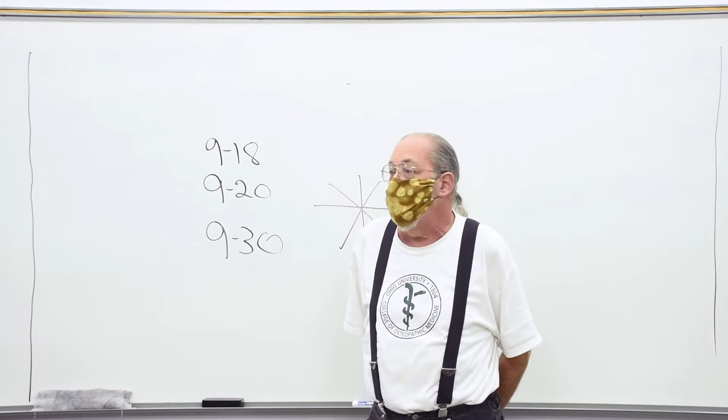Of course, you have to do other things too. You have to understand some of the principles involved as well. It's typically the multiple choice that knocks people down. That's what I often see, and that's what happened last exam. And also the all-or-none, people making what I call stupid mistakes. If you made stupid mistakes, where you look at it and go, how in the world could I have done that, that's the kind of thing you need to avoid.

So the exam will be the same. I haven't said it yet, but you know there's going to be a problem similar to these, involving Newton's laws and so forth, but you'll have the opportunity to opt out of one of the problems. There'll be 4 problems, and you choose the 3 you want to do. And the equation sheet will be attached to the exam. That saves you the trouble of memorizing the equations, but you still have to know what to do with them. The problem-solving technique is the key thing.

So once again, Monday, after the Monday lesson, I'll have all of the homework problems posted. That gives you a couple days to take a look at them before the exam. The lab for torque, I think if you've looked, it's very easy, but it's not due next week, it's due the following week. So you can concentrate on studying this material for the exam coming up on Wednesday.

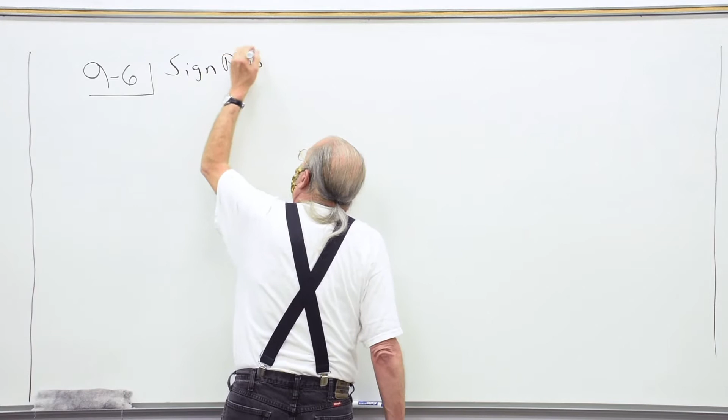Let's take a look at these. Again, we do these problems so you can learn some of the techniques used. The sign problem is example 9-6. In this problem, if you go down to downtown Frostburg, or any small town or certain sub-neighborhoods of New York City, you'll see this arrangement. This is a way of hanging a sign. I call this the sign problem.

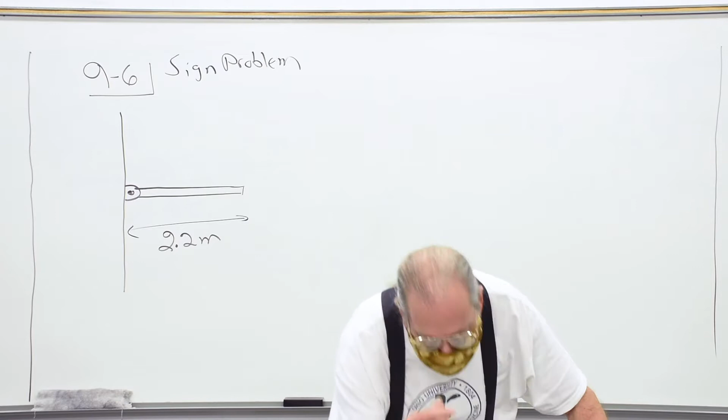It's such a common thing, it's a good one to look at. What we have here is a wall, and there's a hinge on the wall. Then we have a beam coming out, a wooden beam. In this case, the beam has a mass, it's 2.2 meters long, so the distance here is 2.2 meters. And the mass of the beam, I'll call it little m, is 25 kilograms.

I don't recommend doing what the text did, which is using a little m and a big M. I like to use an M1 and an M2, unless you have a writing technique where you make sure you can tell your little m from your big M. Otherwise you can get confused, and if you use one instead of the other, that's going to cause problems. Now, this is tied up with a wire or rope to the very end, which runs up here, and we're told that it makes an angle of 30 degrees.

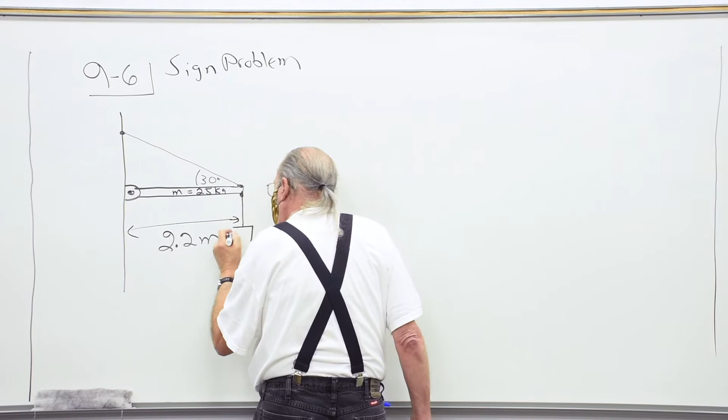All right, and it's fastened up here, and then tied to the end is a sign.

What the hell, I'll call it Uno's, because I went to Uno's yesterday. I had one of their thin pizzas, and man, I was in such a bum mood because of all this stuff going on. It just made me feel great.

Okay, well, Big M is 28 kilograms. The beam is 25 kilograms. The beam is 2.2 meters long, and the rope or wire is up 30 degrees from straight across.

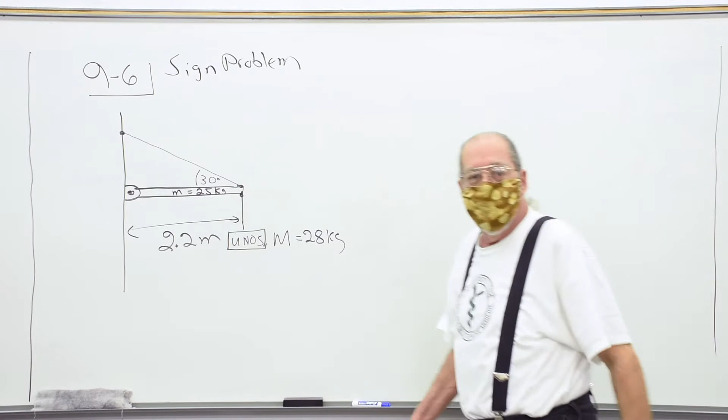And what you want to find here are all of the forces. This is the question: what's the tension in the wire? And you could say, what are the magnitude and direction of the hinge force? In this case, because it's not just friction here and so forth, there could be an X and a Y component to that hinge force.

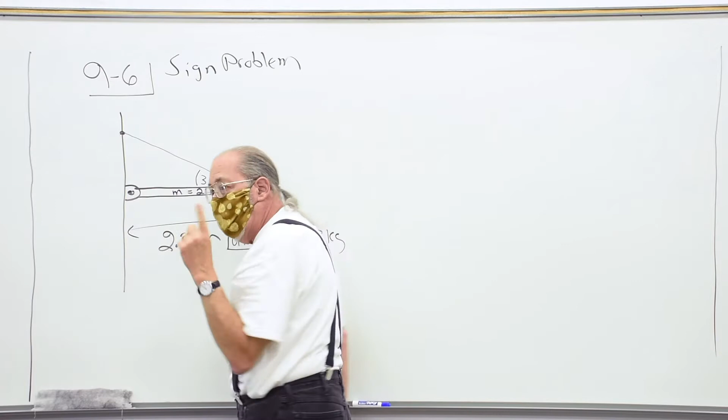So you're asked to find the X and Y components of the hinge force and the tension, or equivalently, if you know the X and Y components of the hinge force, you can find the direction of the force exerted by the hinge and its magnitude. That's a vector problem from way back in chapter 3.

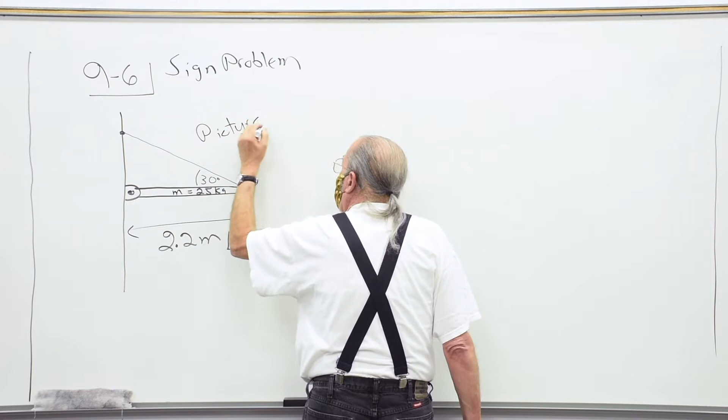All right? So we've got a reasonable picture here. Now we have to draw our free body diagram. Once again, the question is, well, because it's a statics problem and nothing is moving, anything can be considered the object that we're going to draw the free body diagram for. But what we choose are the objects or the places where the forces come together.

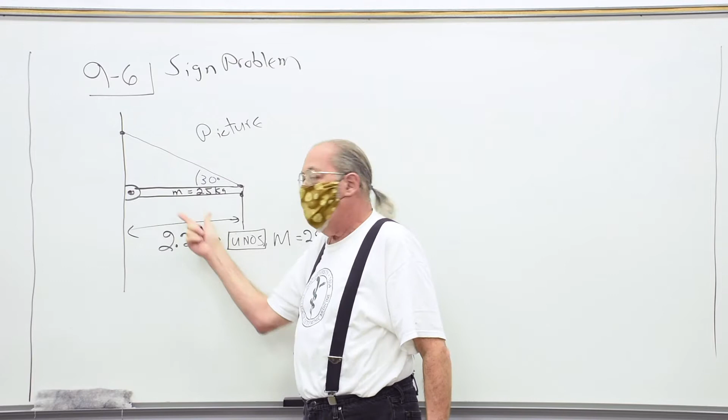Well, the place where the forces come together is the beam. Everything is touching or influencing the beam. So we're going to consider the beam. We draw the beam. There's our beam. And now we have to draw it straight, of course. That's straight. Closer to straight. Yeah.

Gravity is acting on the beam. But we assume it's a uniform beam. We have to do that. So where is the force of gravity effectively concentrated? The center. The center of gravity of the beam is here in the middle. So what we have here downwards, acting on the middle, is little m times g.

And we need to mark these distances. You need to mark all of the distances. Over here on the end, we know that this is pulling down, and we formerly solved for it with the chandelier. I'm going to skip that step now. We know that the tension right here is going to be big M times G.

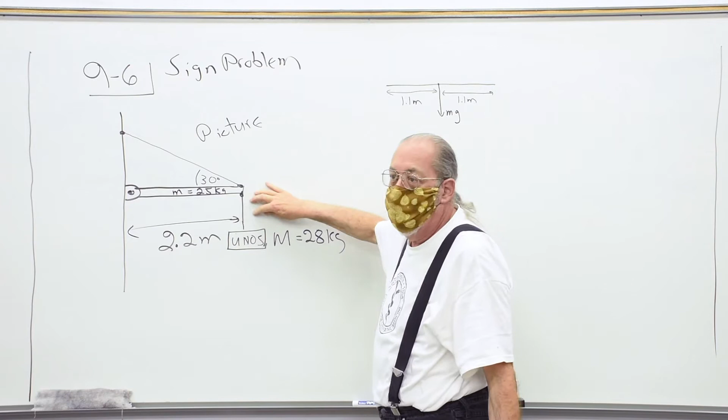Technically, we draw the free body diagram of the UNOS sign. We get that the tension is equal to the weight of the sign. But I'm just going to skip over that part. So we know that out here is another vector downwards of big M times G. Then there is a tension this way. Now, let's talk about this.

The textbook does this a different way. I'm going to do it my way. Somewhere in between my way and the textbook way, you'll see. The tension, we know the direction of the tension. It has to be 30 degrees up. Ropes pull, right? Ropes pull. All we need is the magnitude, one unknown. So I'm going to draw it like this.

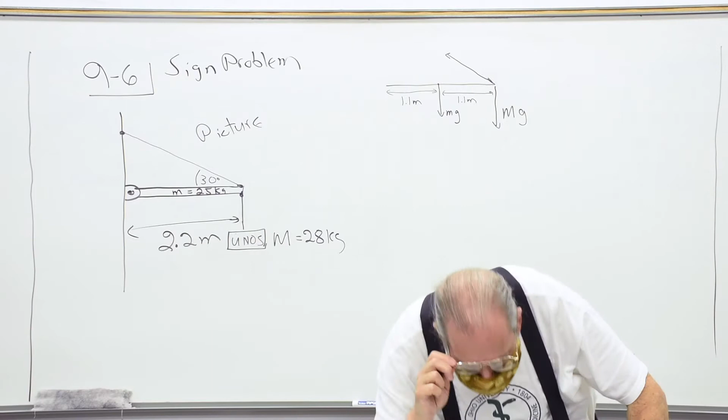Like that. And I'm just going to call it FT, or they call it FT, so I will too. Generally, I just call it capital T, but whatever. And we need to draw this angle. It's 30 degrees.

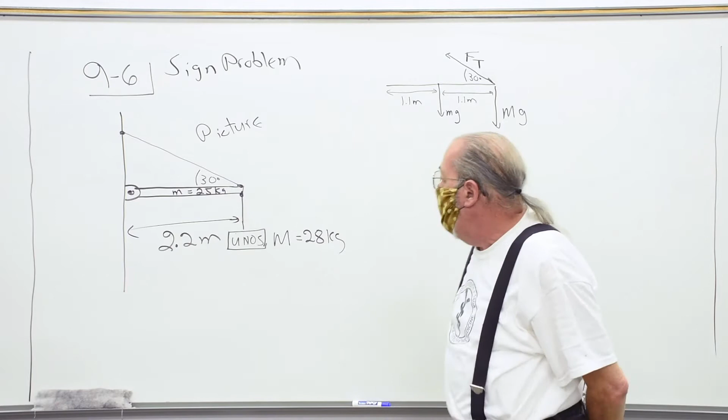Then there's the hinge force. The trouble with the hinge force is we don't know the direction of the hinge force, and we don't know the magnitude of the hinge force either. Now, we could draw it like this and put in an unknown angle and have to solve for the angle. But it is equivalent—remember that knowing the two components of a vector is equivalent to knowing the vector. If you know the two components, you can find the angle and the magnitude. Okay? So, we know that the hinge is not going to be pulling, it's going to be pushing.

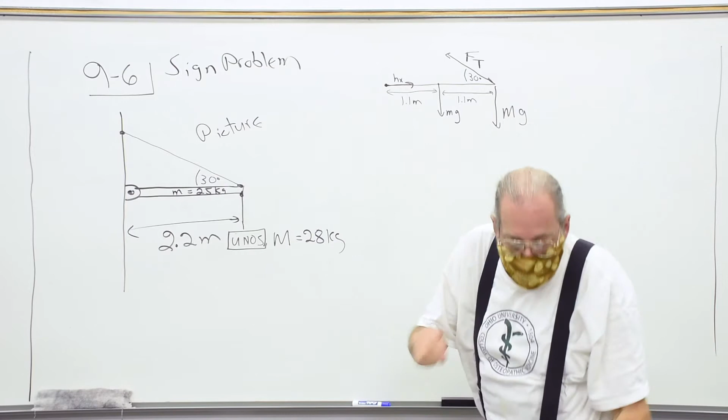So there is an x component to the hinge force, right there. Do they use capital H? They use FHY. Oh, heck, man, just call it HX and HY. And then there could be a vertical component. Now, this is interesting. Depending on the arrangement of the stuff, the hinge force could be up or it could be down.

The vertical component could be up or could be down, depending on where this sign is attached and so forth. But I think what you can see is, if this were frictionless, because gravity is pulling this way, it would fall.

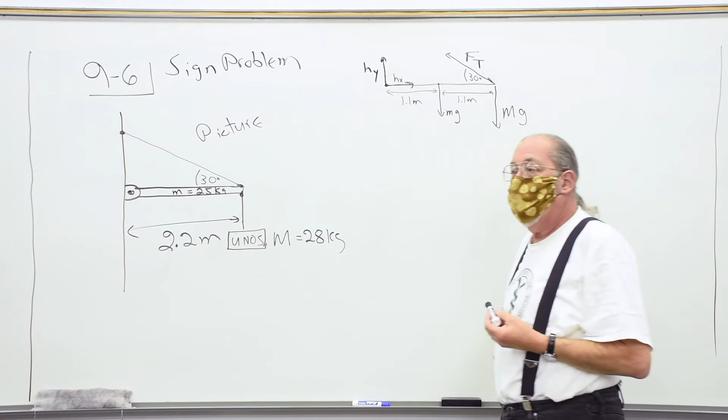So most likely, the y component is upwards. Now, if you're not sure, you assume a direction, and if you get a negative sign, it means that the actual direction of the force is opposite what you assumed. So at the moment, we'll just assume it's upwards. But if it turns out it was downwards, we'll get a negative sign for this, and that's perfectly fine.

Normally, when we label these things, these are the magnitudes of the forces, not the components, not the actual component values. They're the absolute value of these things. So if you get a negative sign for an absolute value, it means your assumption of the direction was wrong. You don't have to redo the problem. You just say, my assumption was wrong. I had it drawn up. Therefore, it is down.

Yes? I might have missed it, but how do you know that the hinge is pushing instead of pulling? Okay, look at the x components. Does this have an x component? Does this? Does this? Does this? Which way is it? To the left. So what's the only thing left to counteract it?

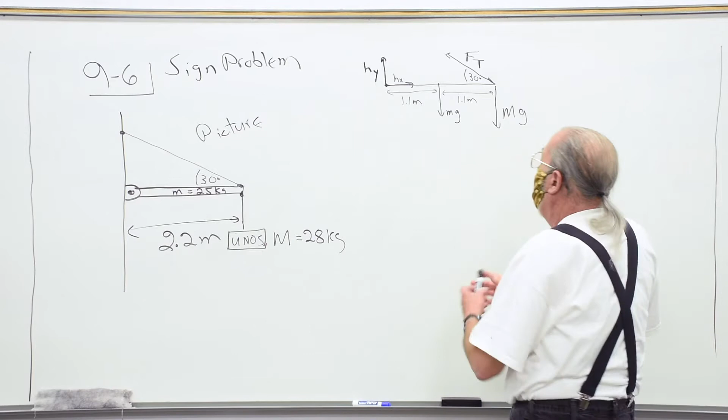The hinge. So this is the thinking that's left out in the textbook. You say, how do they know that if this is a pin here, this thing could be pulling on it. But since the x forces have to cancel out, we say, well, this is going this way, so this will counteract that. So any other questions? These are the little things that you can look at and go, how the hell did they know that? Well, there was some analysis done.

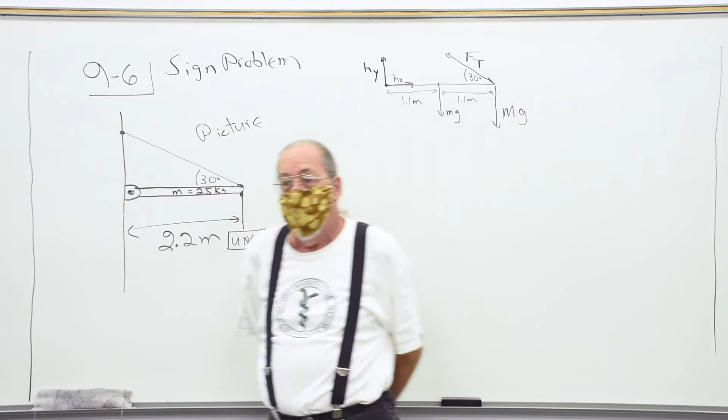Yes? How does a hinge actually pull something? Doesn't it just allow something to move on a fixed? No, it's attached to the wall. It's physically fastened to the wall. If it was just pressed against the wall, it could not pull. But see, I drew that there just to show that it's fastened to the wall. So it can exert a force in any direction. That sucker isn't just pressed against the wall, it is fastened to the wall, glued to the wall. So it could push or pull, okay?

Picture, free body diagram, coordinate system, might as well use the usual, okay? Immediately, we can consider the sum of all the x components. Now we apply the conditions of equilibrium.

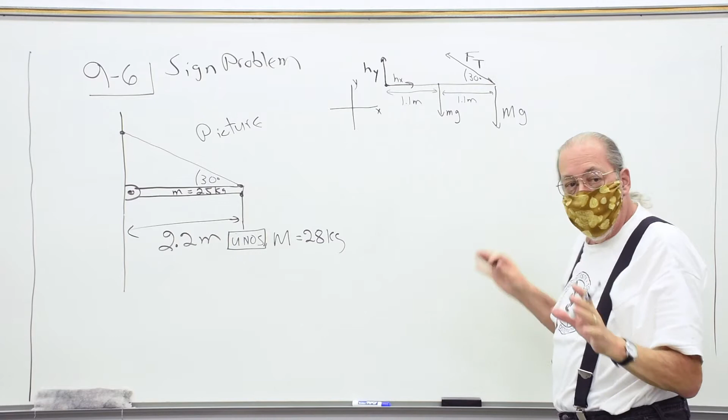As I say, the best thing to do is to apply the first condition of equilibrium initially. Don't use torques unless you have to. If I apply the first condition, this says that the sum of all the x components and the sum of all the y components must be 0. So if I say the sum of all the x components is equal to 0, well, now we see

that we have a plus hx, and then if we break this into its components, the x component of this tension force, this is the adjacent, this is the opposite, and this is, of course, the hypotenuse. Adjacent means which trig function? Quick, adjacent goes with cosine. You should be able to do that automatically even if I burst you out of your bed at 3 in the morning. So it's, and is it positive or negative? It's negative. Minus

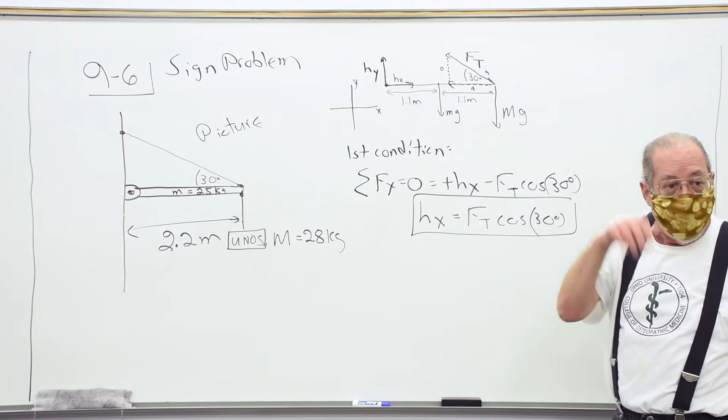ft cosine 30 degrees. So there, it says the x component of the hinge force, bringing this over, is the tension force, but we don't know yet the tension force. But once we get, if we get the tension force, somehow, then we will put it in here and we'll get the x component of the hinge force. All right, but we're not finished yet.

Now, if we do the sum of all the y components, that equals 0. And we got a lot here. We got an hy plus hy. Then we have a minus mg. And we also have a minus big mg. And then we have this component pulling up. We've got this component pulling up here. And so we have, and it's the opposite, so we have a plus tension force sine of 30 degrees. Okay?

Let's just leave it like that, okay? Let's just, and I'll make that more like a plus sign. So there's another equation.

So what does this tell us? It tells us once we know the y component of the hinge force, we know this, we know this, we know the sine of 30, we can find the force of the tension once we know the y component of the hinge force. But we don't know that yet. So we got 3 unknowns. We're actually going to have 3 equations, oh my gosh, and 3 unknowns. Don't worry yet, okay? 3 equations and 3 unknowns. But once we get the tension force, we could find the y component of that. We could also find the x component, okay, from that. All right.

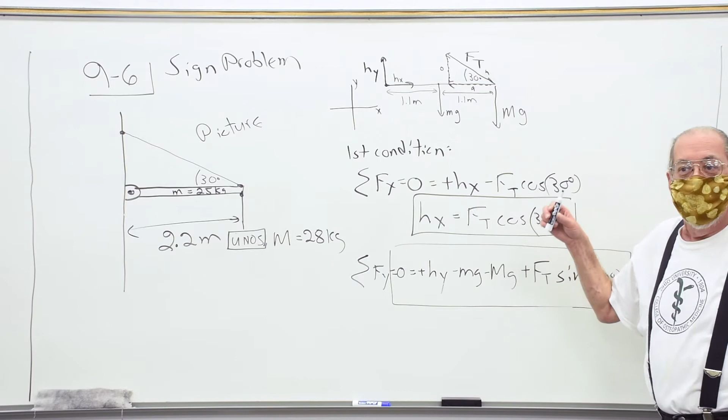We ran out of the first condition. So when you run out of number 1, where do you go? Number 2. You go to number 2. Okay?

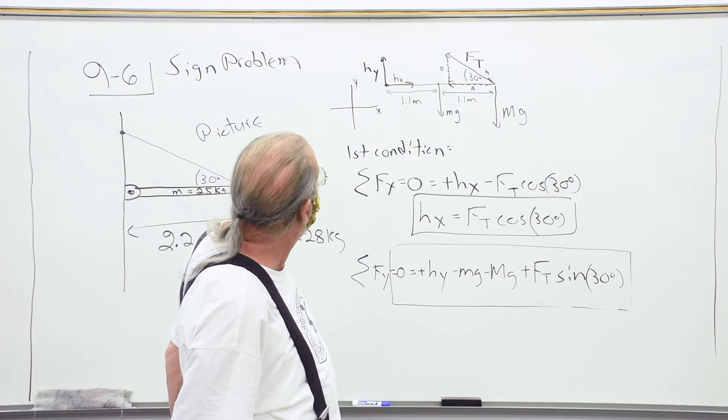So now we've got to use the second condition of equilibrium, which says that the sum of the torques about any pivot you choose is going to be 0. Now, any pivot can be chosen, but there are a couple of places here where it really is a no-brainer to put the pivot. When you choose a pivot, any force applied to that pivot produces a torque of how much? There's a good multiple choice question. Once you choose a pivot, it produces a torque of 0.

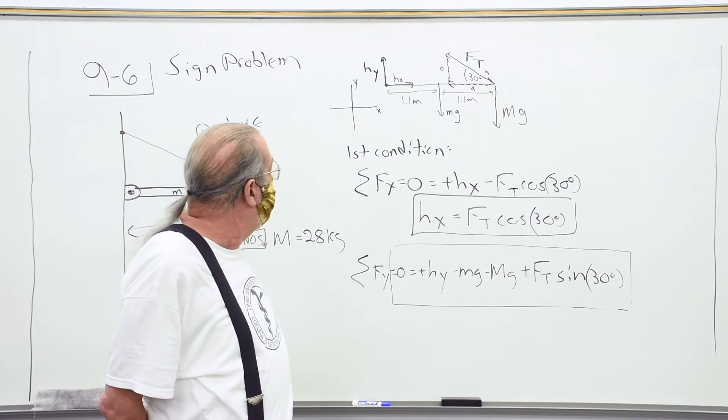Well, I see two places where multiple forces are applied. What are they? The left side's got Hx and Hy, and the right end has got Ft and big Mg. That says if I put my pivot here, the tension force will not be in the resulting equation. And as a matter of fact, if I put my pivot here, will Hx be in the equation? Where does the line of action of Hx go? Right through the pivot. Okay?

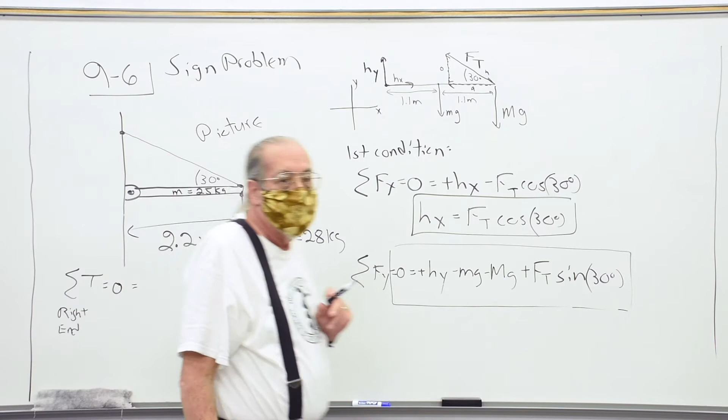So what the hell? I'm free-forming now, which means I could screw up, so you got to watch me. I'm going to put my pivot at the right end. So over here, the sum of the torques—and you must tell me, you must specify—the sum of the torques about the right end is 0. All right.

Ft does not produce a torque. Big Mg does not produce a torque about that point. Hx does not produce a torque about that point. This is almost the ideal point. Only Hy and little mg are in this, right? Well, hell, that's going to be easy.

So, looking at Hy—here's our pivot, I'll put our torque there—is this a positive or a negative torque? If this were the only force acting about this point, what would it do? It would go clockwise. Clockwise is negative.

Negative. The angle here is 90 degrees. The distance is 2.2 meters. So it's minus Hy times 2.2 meters.

And this one is going to produce what sign? Positive. Well, how can you tell it's got to be positive? Because you got a negative, you better have a positive if it's going to add to 0. So we have plus little mg times 1.1 meters. And this again is 90 degrees.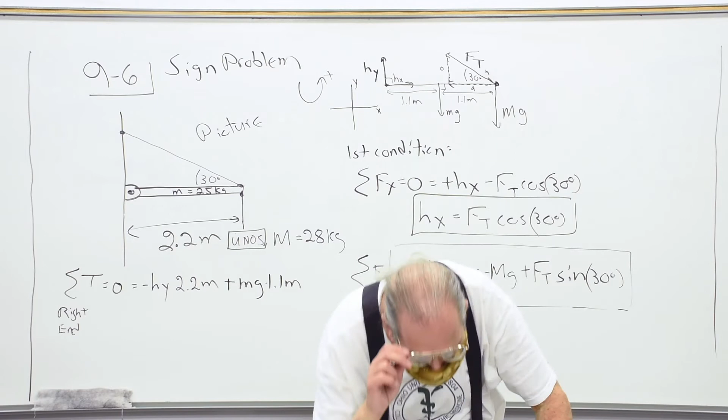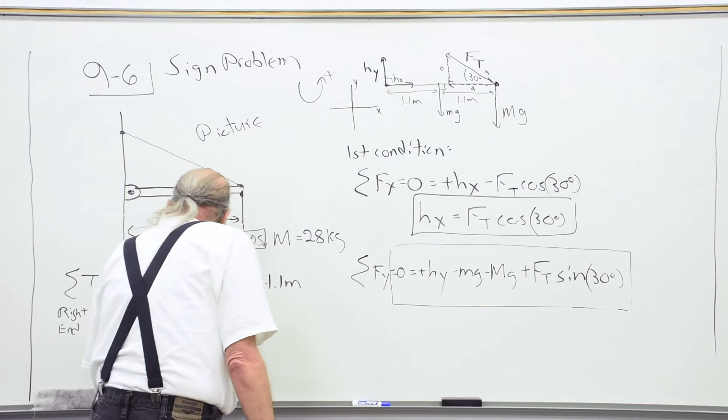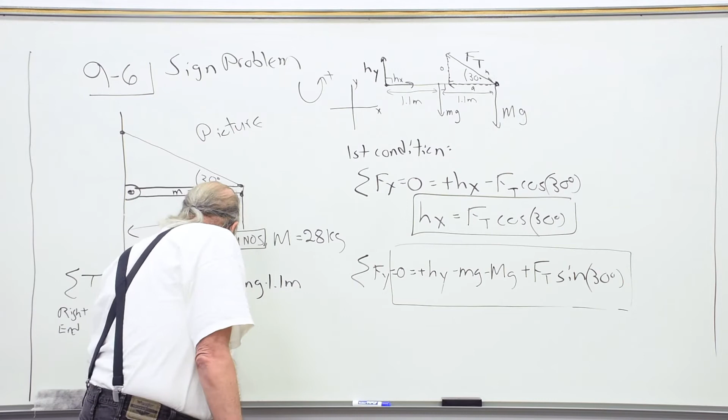So that's it. Okay? And if you solve that, I believe somewhere they did this here. Yes, all right. When you solve that, you get 123. Let's just do it. What you get is Hy times 2.2 meters equals mg times 1.1 meters. And the meters cancel. And this says that Hy is 1.1 over 2.2 times little mg, which is 1/2 of little mg, which is 1/2 times little m is 25 kilograms, 9.8 meters per second squared. And I believe that is 123 newtons.

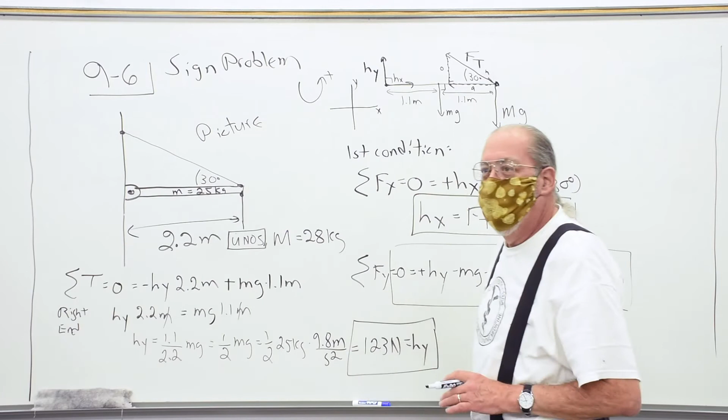Hot dog. Yes. You push the computer screen down. Did I what? You push the computer screen down so we can see the bottom of the desk. Oh, I hate this thing. Yes, no? Can you see it? Perfect time. Are we checking? Yes.

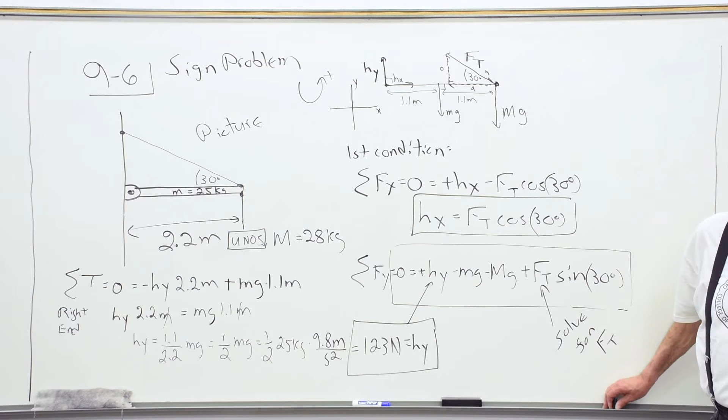All right, we've got HY. Well, quote, I'm going to leave it to you. You take this and you put it into there, and you put in little mg, big MG, and you solve this for FT. Do people see that? If you know HY and little m and big M, you can move all of this over and divide by the sine of 30, and you can solve for FT.

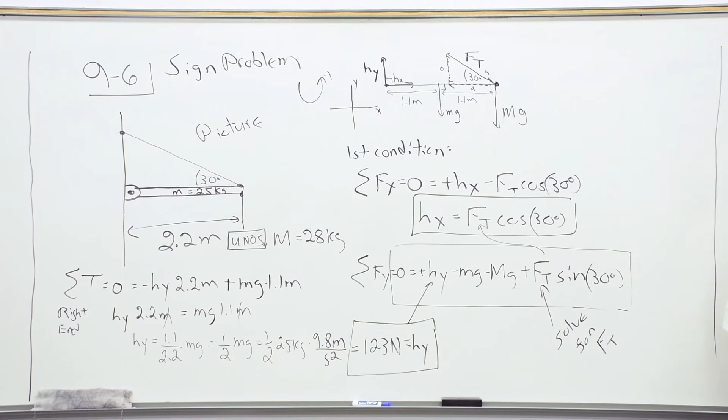And then you take that, once you have that, and you put it in there, and you find HX. And you're done. Then you're done. Okay?

By being clever, by noting that the line of action of this force goes through that point, and these are applied at that point, these don't occur in the final equation, and you can find that. And it turned out to be positive. And you can see what's happening is, this thing wants to go down. It wants to go down, so this is holding it up. This is holding it up. And is it, Brianna? That it's pushing because it's offsetting the tension.

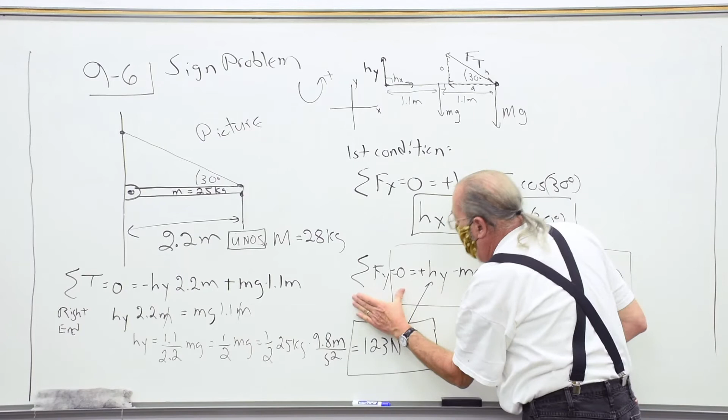So at this point, see, once you get to the equations, the physics is done. The physics is doing this. The physics is this. The physics is that. That gives you the equations. Then it's a math problem. In this case, you've actually got 3 equations and 3 unknowns because you're clever. One of the equations you get right away only involves one unknown, and you can solve it. Boom. And then you can put it in the next one and get the next. You can put that in the next and get it, and you're done. That doesn't always happen, but it does in this case.

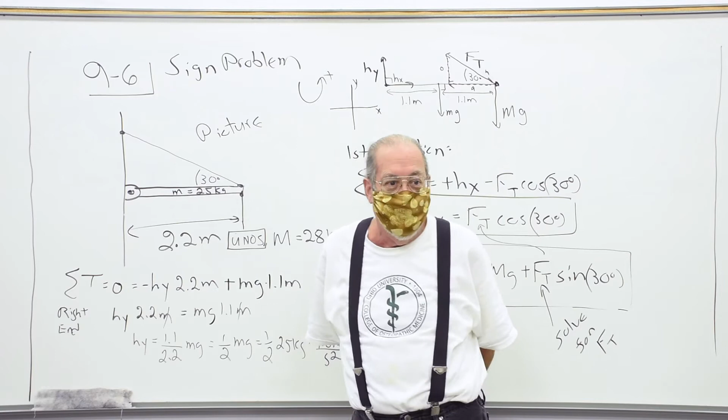Let's go and let's look at the ladder problem.

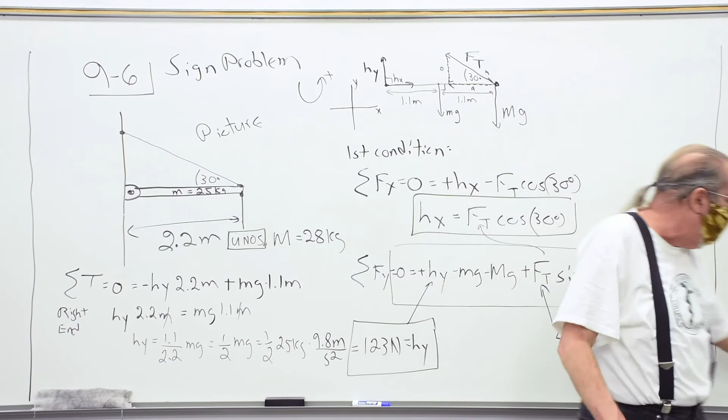Ladders, people, are dangerous. My house is 3 stories high in the back, and it is a nightmare to paint. If I ever do it again, I'm buying one of those trucks with a bucket - I'm not doing it from a ladder anymore. That's crazy, that's nuts. Someday I'd love a ranch house and never go up or downstairs again, but that's not going to happen. You know how hard it is to move after being in a place for 30 years with all the garbage you've collected. Anybody watch American Pickers? I've been in a house like that - not mine, but I can't believe what some people live in. So I can't give that up. I only have 3 of that - if I sell you one I'll only have 2, and I've got 3 right now.

The ladder problem. This is example 9-7, another classic case that does occur out there.

In this case, what we have is a ladder up against a wall, and it's 5 meters long. Mine's about that - I've got one that's 32 feet, that's more like 10 meters. It's really long, sitting like this.

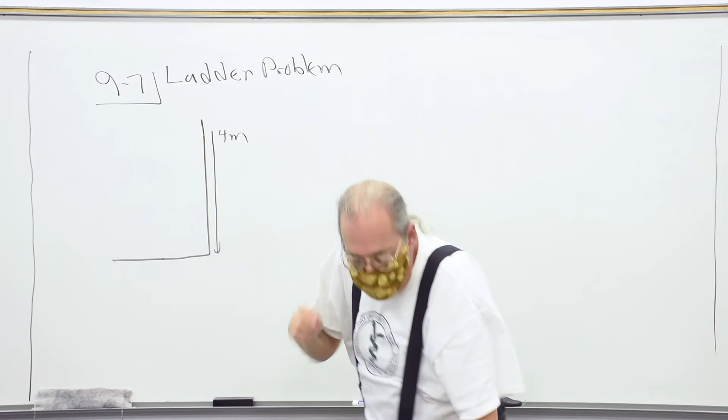We are told it is 4 meters from the ground to the top of the ladder. Actually, it's not quite that steep. Let's see - it leans against the wall. The ladder is 5 meters long, and it touches up here 4 meters above the ground.

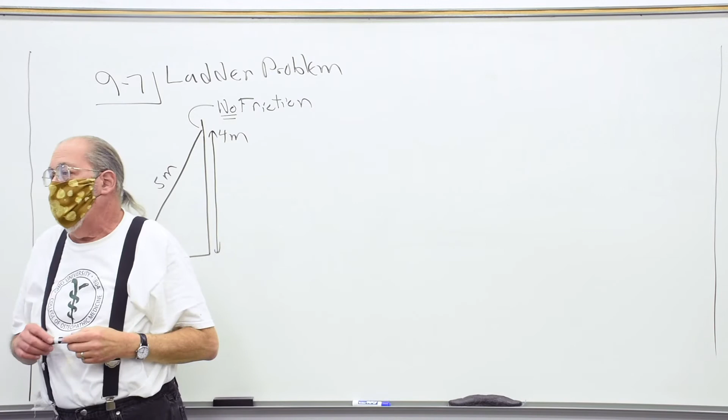And of course there is friction down here - there better be, or what will happen if there isn't? This is interesting: we have to make the assumption of no friction at the top. It turns out if there's any friction up there, it's an infinitely harder problem. Now you might say that's not realistic, but it is.

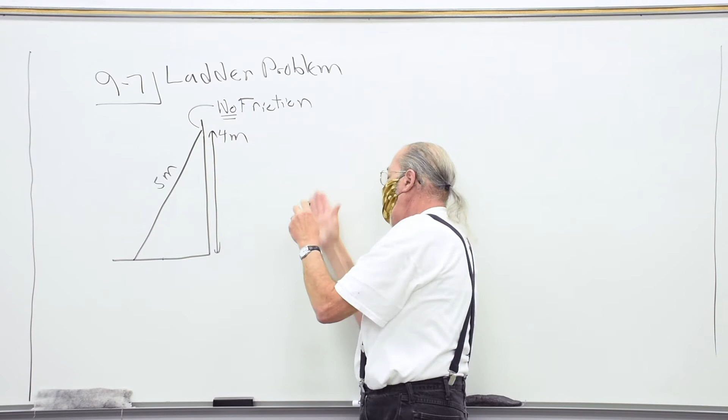If you ever go to Washington D.C. and look at the Air and Space Museum, the outside is made of highly polished granite. You take a ladder with a plastic top and touch it against that granite - even if I touch this board, there's almost no friction. So there's zero friction up there, okay?

And what we want to find is all the forces. The mass of the ladder is 12 kilograms.

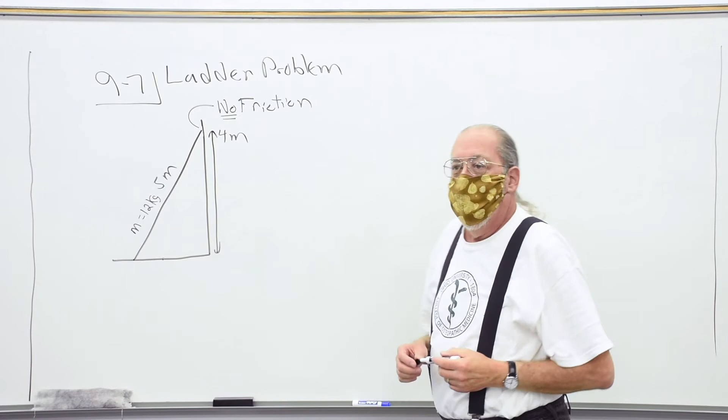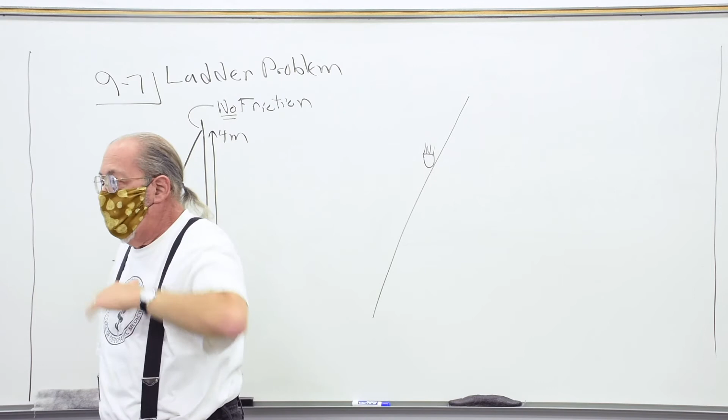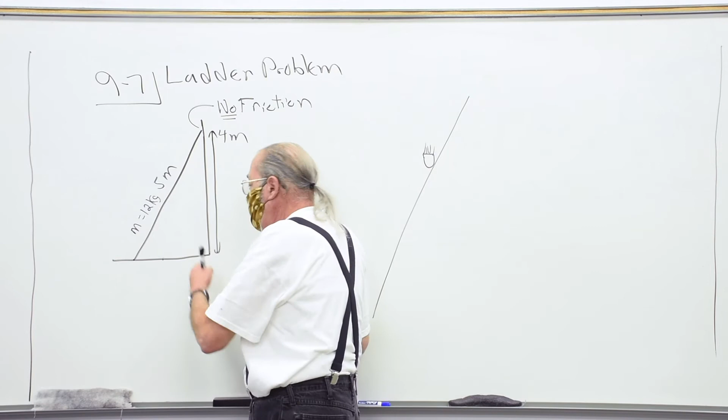Now, since I'm a ladder climber all the time, and a lot of you will have ladders someday - there is a proper angle for a ladder. If you look at the rungs, they're attached to the ladder at an angle, and the top of the rung should be horizontal when placed properly. If it's too steep or too far out, it's not at the proper angle. What happens if it's too far out? I've seen guys working on their houses and thought someone better call an ambulance. I already told you about the guy who got dragged off the roof. And if you put it too close, you do a John Belushi from Animal House - you go off, okay?

So the question here is to find all of the forces involved, with no friction at the top. So we have a picture, check, and a free body diagram.

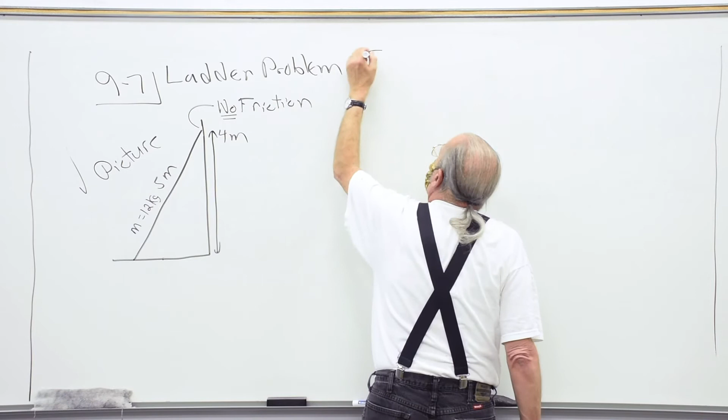In this case, the forces are the wall and the ground, acting on the ladder. We consider the ladder and the forces on it - that's what we draw the free body diagram on. So we draw the ladder, and we have to include some of these dimensions: this is 4 meters, this is 5 meters, like that.

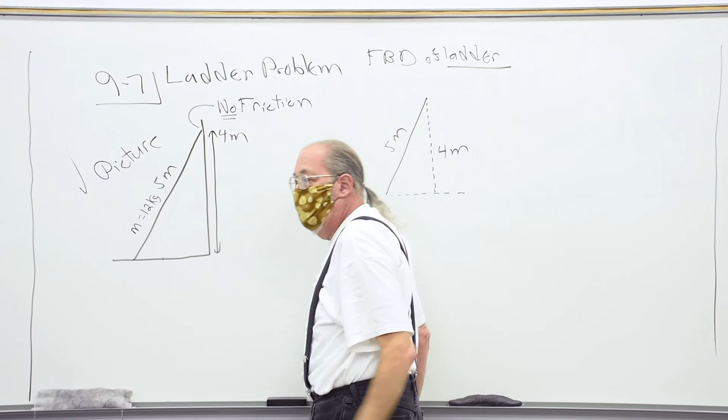Now, if there is no friction up here at the top, does that mean there's no force? What's the direction of friction - parallel to the interface. If there was a frictional force, it would act this way, but there is none, which means the force is horizontal, and it must obviously be to the left. I want to be consistent with the text - they call this the wall force.

Does everybody see why it has to be to the left? The ladder wants to go this way, and it's countering that, going the other way. It must not tilt up or down, because that would mean friction, and there's none. So it's a normal force—this is the normal force of the wall on the ladder. It's another way of looking at it.

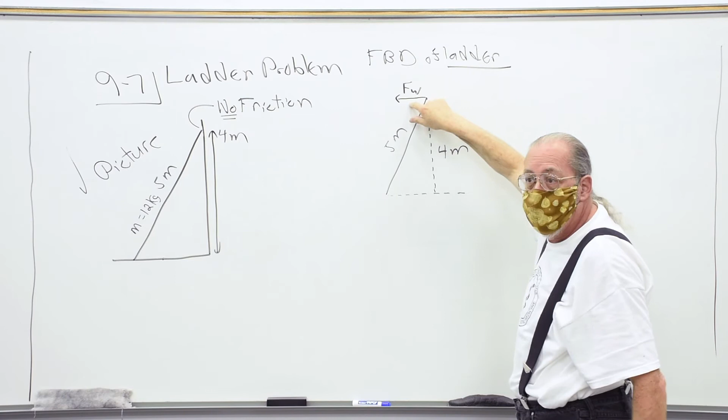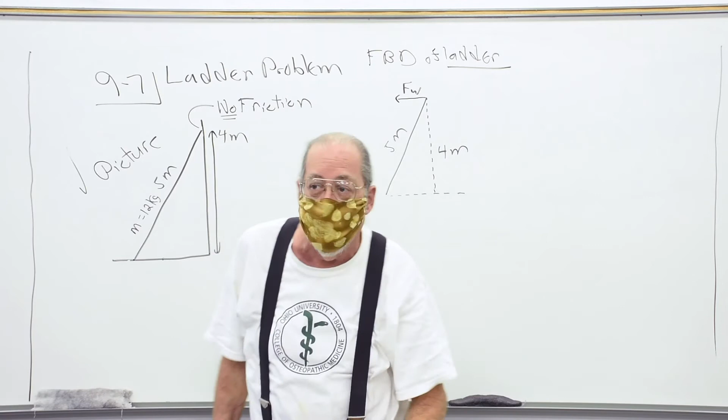But like we did for the hinge force, since we don't know the direction or magnitude, it's easier to draw it as two components. Obviously there has to be something to counteract this.

What about gravity? Let's look at gravity. Where's gravity acting? Downwards, from the center. Good. Right here in the middle is mg.

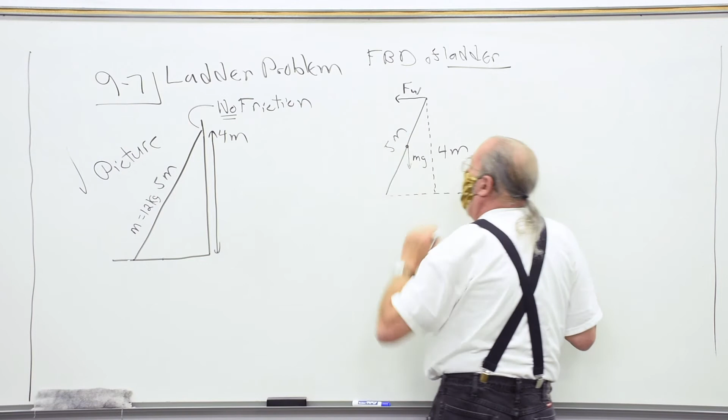And if we want—this is, I think I'll leave it out, but it's 2.5 meters here and 2.5 meters there, okay? Then there's the ground force. Well, the ground isn't pulling down for sure, it's pushing up. In fact, the ground doesn't have to be pushing completely up, straight up.

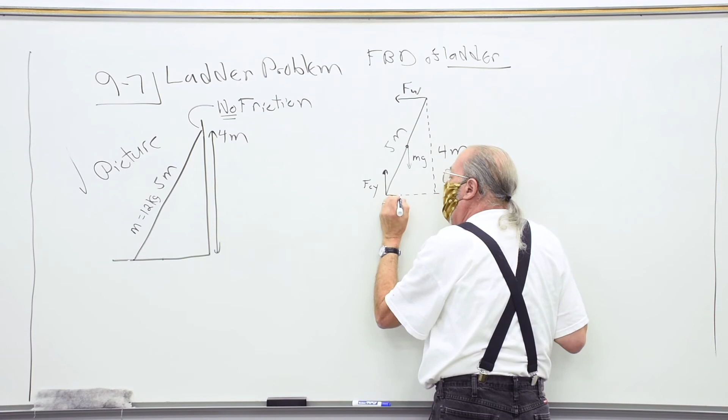So are they calling this FCY? I would call it—well, they call it FC. I don't know why they do that. But there is a Y component here, and then there is an X component here. I would have called that a G—force ground Y, force ground X.

Who wrote this book? It's a cement floor. Huh, cement floor—I think that's where the C came from. Does it say it's on a cement floor? Yes, okay, okay, all right. Does the fact that it's cement really mean anything? It means it's gonna hurt more if you fall. Yes, it is. You ever fallen off a ladder? I have. I like what John Belushi does in Animal House—he just, bam, goes back. Or no, what's the other one—Christmas Vacation, isn't it Christmas Vacation where Chevy Chase, or whoever, I forget, falls?

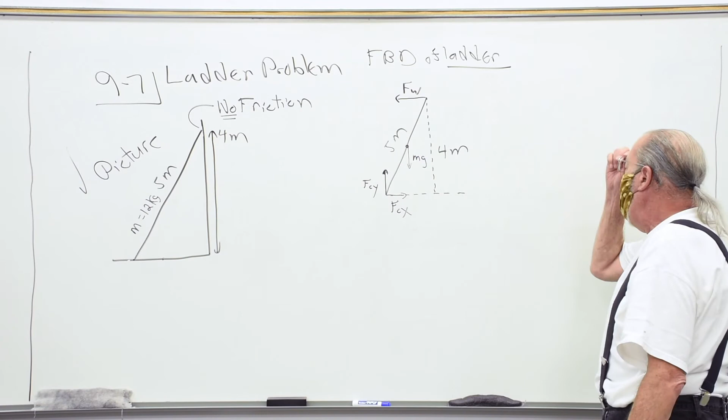All right, this is actually, it looks complicated, but so what do we apply first—the torques or the first condition? First condition. We apply the first condition of equilibrium.

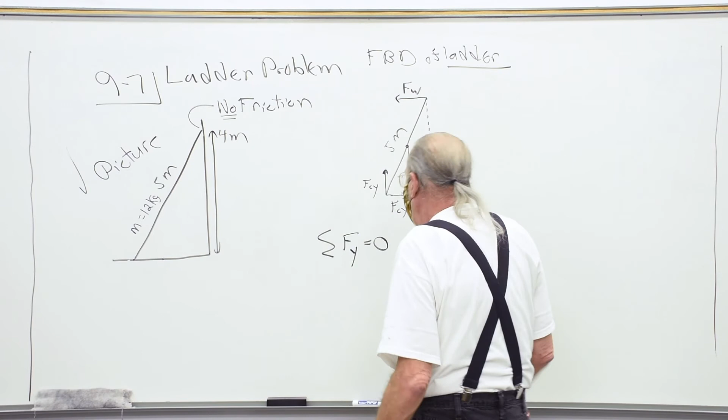The sum of all the y components on the ladder is 0 because its acceleration is 0. Well, this has no y component—the wall doesn't, and the cement floor X doesn't. But we have a plus FCY and a minus mg. And there you are—the y component, the floor is pushing up with an amount equal to the weight of the ladder.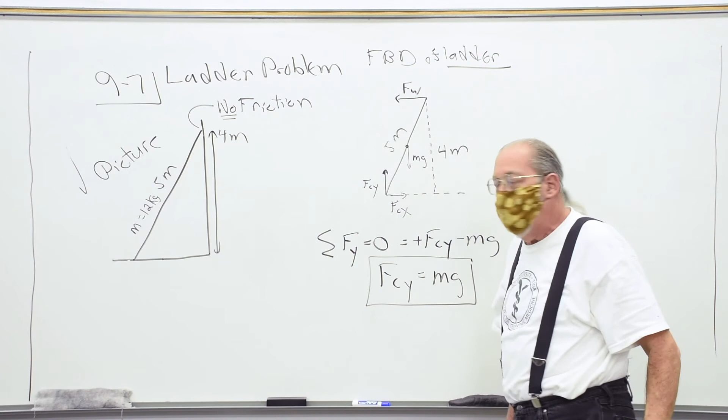Put in 12 kilograms times 9.8, it comes out to be 118 newtons. So you put in the 12 kilograms—I'm letting you do that calculational part.

That's math, that's arithmetic, that's not—all right, let us do the horizontal. The sum of all the x components is also equal to 0. And we have a plus FCX and a minus F wall, which tells us that the force exerted by the wall offsets the horizontal force exerted by the floor. One's pushing it left, one's pushing it right.

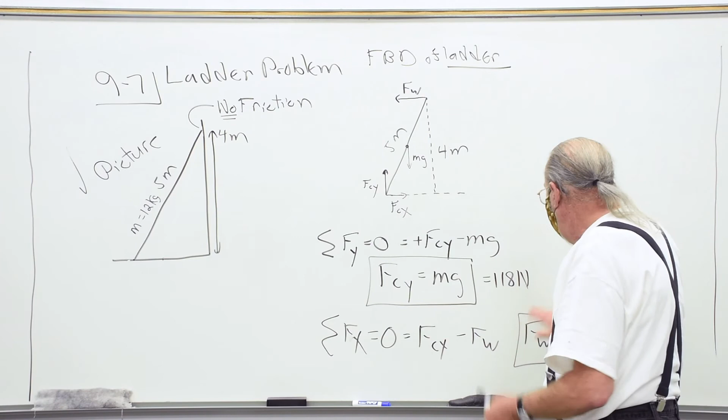But we don't know either one. We don't know either one. But at least we know that once we get one, we got the other right away. So how do we get one or the other? Well, if we've used the first condition of equilibrium, now we go to the second. It's kind of a no-brainer.

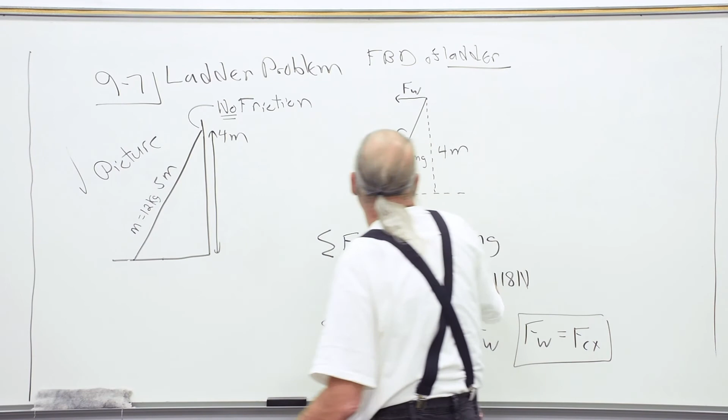I'm going to take the drawing off here to make room. Anybody want to suggest where I stick the pivot? That sounds disgusting, but anyway—what's a pivot I should use? Which is the only point that has two forces on it? The bottom of the ladder. Obviously, the bottom of the ladder.

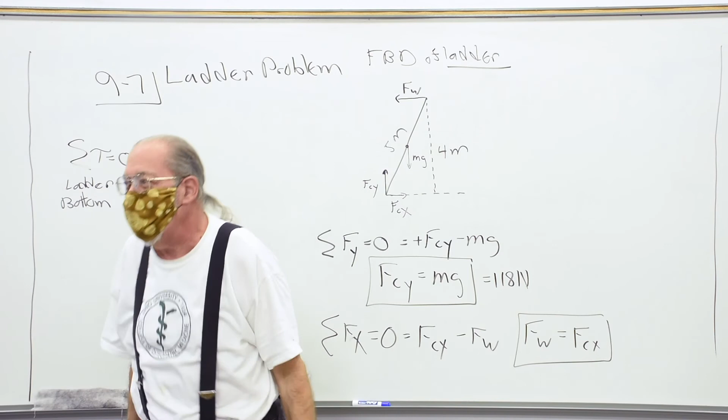So the sum of all the torques about the ladder bottom—notice how I write it in here—must equal 0. So does FCY or FCX produce any torque about the bottom? No, that's why we chose it. Okay, so there's a 0 and a 0, I won't write them down.

All right, now what about gravity and the wall force. Oh man, this is not a 90-degree angle, is it? And this sure isn't a 90-degree angle either. However, could we find those angles? Since we know the opposite and the hypotenuse, could we find this angle and this angle? Yes, we could. And if I know this angle, can I find that angle? Yes, I could. And then could I find this angle? Yes.

And then you use the torque as Fr sine theta. Oh man, oh man, well, we could do that, but there's an easier way. What is the torque produced? Well, first let's look at Fw—is that, compared to this point, a positive or negative? It's this—is that positive or negative? Positive, that is positive, so we have a plus Fw, and how far is that force?

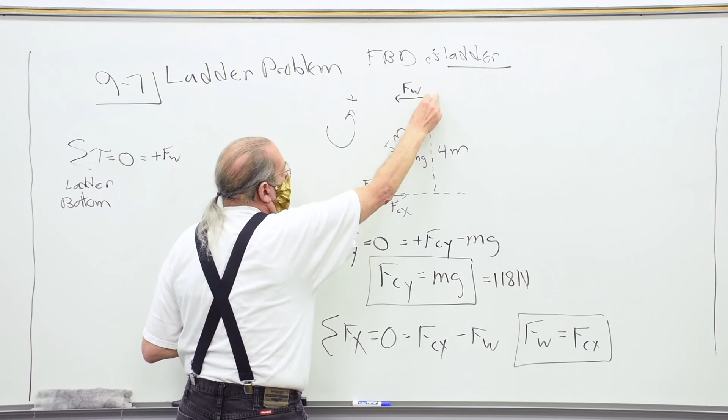What? Well, let me put it this way. This is where you get clever. Let me draw the line of action of this force.

I could use this angle and use Fw times 5 meters sine of this angle, but I don't want to do that. It's too much work.

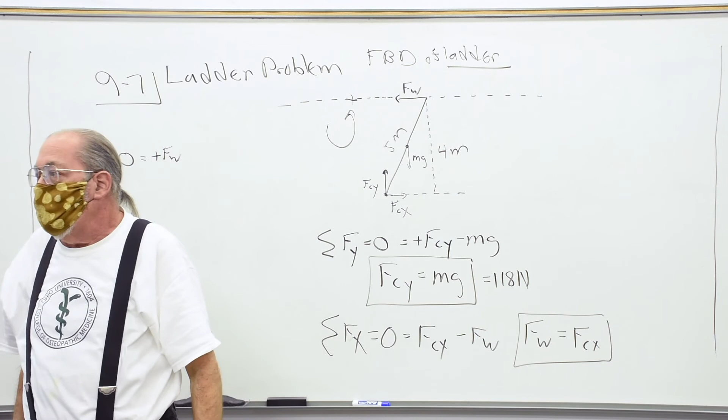What is the distance from the line of action of Fw from the pivot? 4 meters, you see that? This distance from here to here is 4 meters. That's it. You don't have to use Fr sine theta. You can just look at it and say, that's 4 meters. Okay? That's 4 meters, and you're done.

Now what about the torque produced by gravity? Is it plus or minus? It's minus. We better have a minus. And it is little mg.

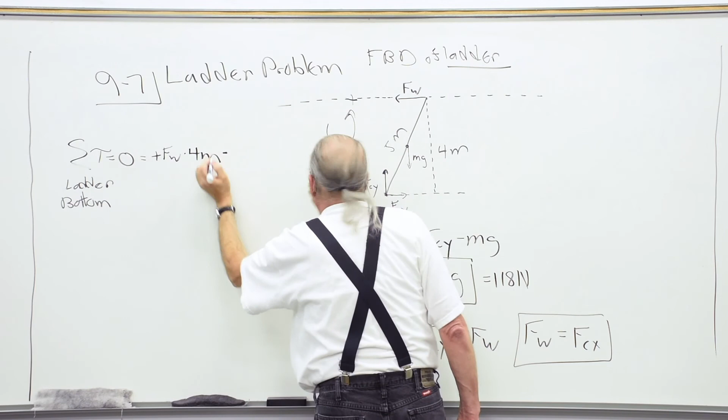Okay, who sees it? 2 meters. Can we figure out this length? Oh wait, yeah, yes, it's a 4, 5, 3. It's a 3, 4. Good for you. Oh yeah, sorry. Yes, 1.5, you get the beer tonight. You get the beer tonight. It's a 3, 4, 5 triangle.

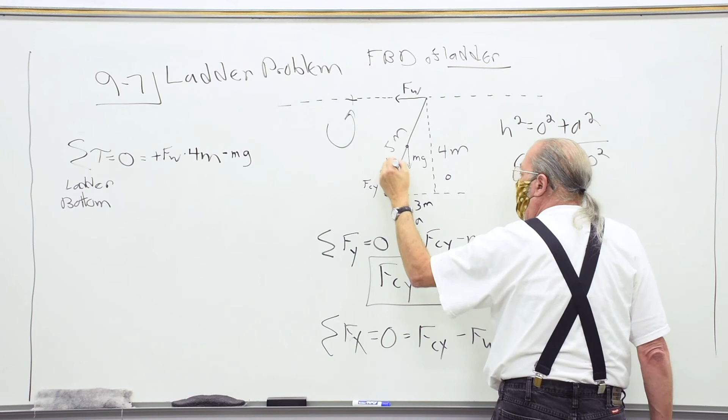You could simply use this side is 5 squared minus 4 squared, square rooted. If you use hypotenuse squared is opposite squared plus adjacent squared, you can solve this for the adjacent. Adjacent squared is the square root of hypotenuse squared minus the opposite squared, and you'll get that this is the adjacent, opposite, hypotenuse. It's 3 meters. All right, so this is in the middle of the ladder.

What is the distance from the line of action of that force to the pivot? 1.5 meters. See, cleverness. You can find all the angles and use Fr sine theta and do all that, but if you're clever, you don't have to. And you solve this, and you get Fw, when you find Fw, it's 44 newtons.

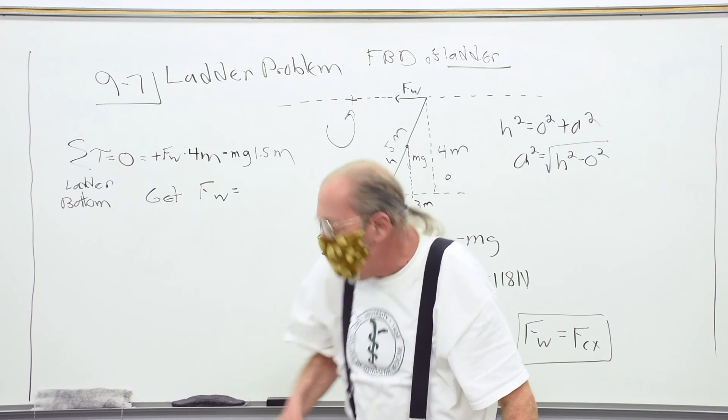And immediately, because of this first condition, we get that the x component of the floor force is also 44 newtons.

There are multiple ways to do problems. That's why we say, remember, torque is equal to Fd, or torque is equal to Fr sine theta. Either one of these will work and give the correct result. This is a hell of a lot harder because you got to do all the intermediate work of finding the angles, and then you got to plug it in, and oh God, okay? This is much easier, all right?

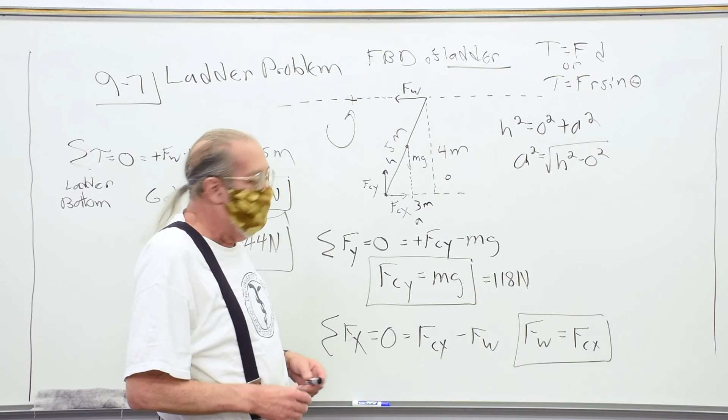Now, I'm going to stop there for today, but the one homework problem I believe I assigned says this: if the ladder is here, and this is frictionless, we always assume this top is frictionless in these problems. The question is, how far, and you're given the coefficient of static friction between the bottom of the ladder and the floor. I think this is the problem, let's take a look at this.

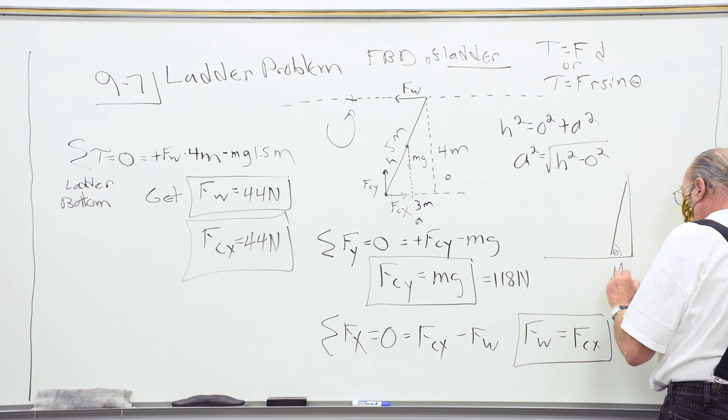I'm just giving you a hint on this so you can get going there. Is this problem? Yes, this is problem 30. Find a formula. You're given this angle here, and you're given mu sub s, and it actually says find a formula for the minimum angle at which it will slip. So you're saying, if I keep bringing this out, how far can I bring it out? What's the angle when it starts to slip?

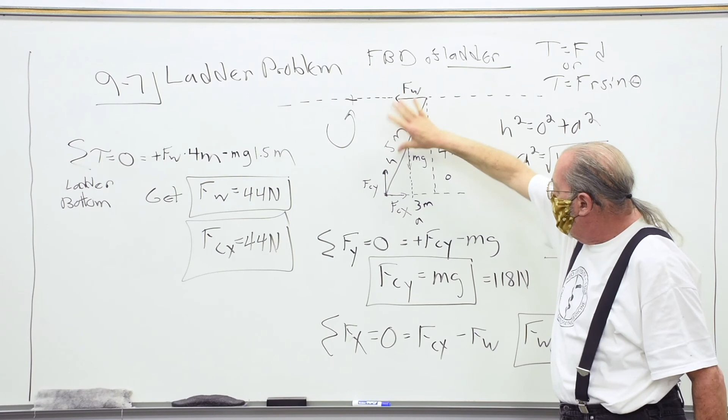So here is the hint. You take this problem, but you don't even have to know the length of the ladder, just make it length L. So you take this problem and you make this L. So the length of the ladder is L. And you don't know the mass of the ladder, so you make it just M.

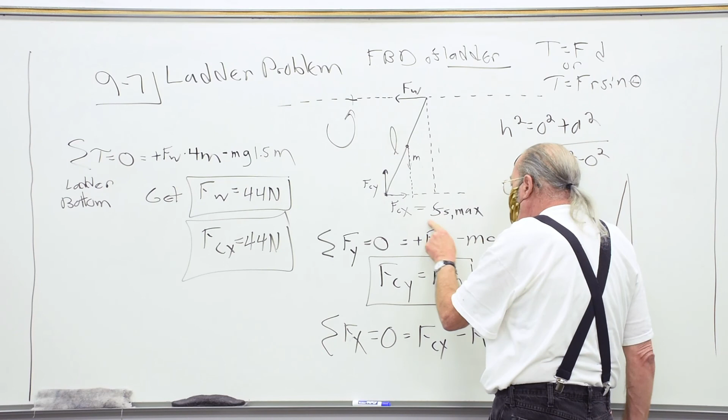And in this problem, this is Fs max. And what you do, as I said, consider the case where the ladder is ready to slip. If you move it 1 millimeter more, it's going to go. In that case, this horizontal force, for problem number 30, this horizontal force is Fs max. And I think you'll get a tangent kind of thing like you did in one of the other ones, and you can actually say how far can you pull that out.

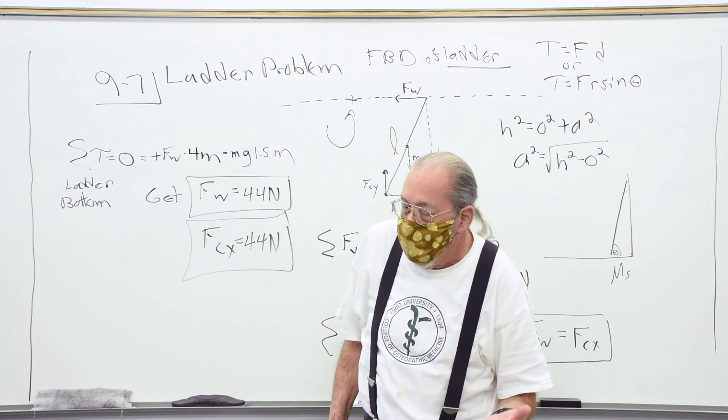All right, have a great weekend and stay safe. Unfortunately, what is the most dangerous place you can go? Where you want to go on the weekend? A bar. Think about it, okay? If you can stay outside, okay, but inside, you're taking a big chance. How far do you trust another student? Okay.